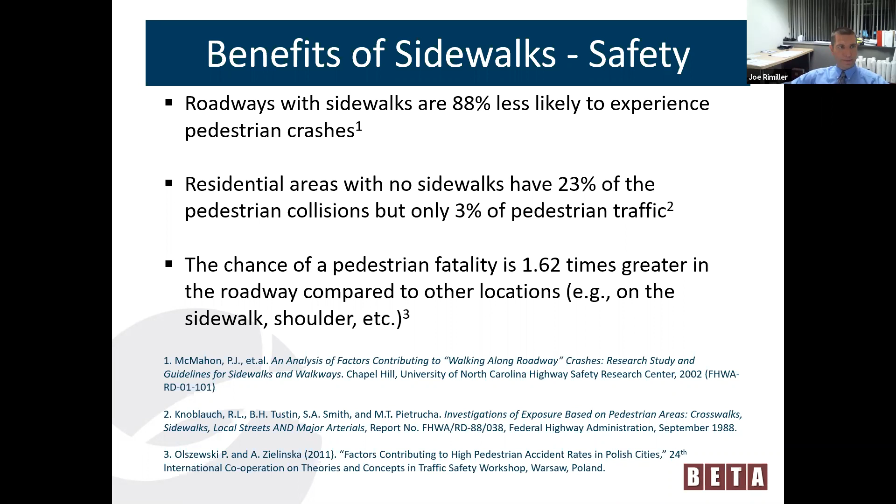In addition to improving safety, sidewalks can benefit a community in several other ways. They can improve public health by encouraging walking, running, and other activities. They reduce reliance on automobiles, which can reduce vehicle emissions and promote better air quality. And they provide accessible paths of travel for users in wheelchairs or with other disabilities.

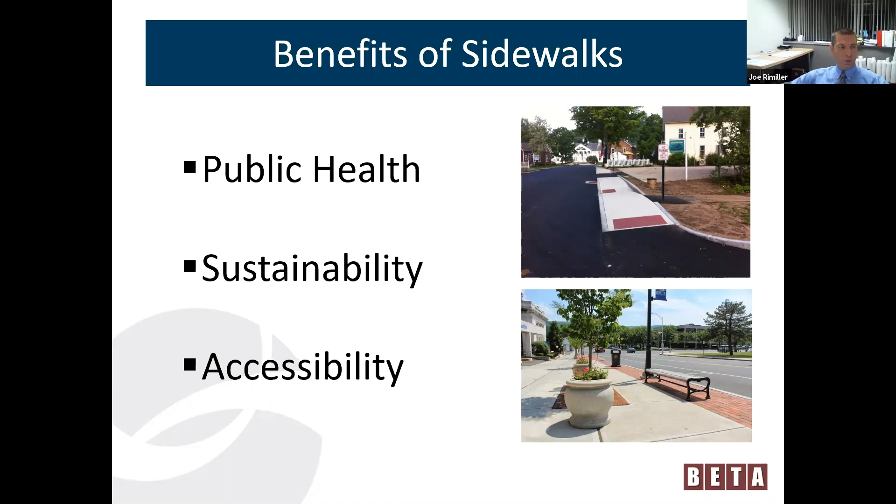This project will involve the installation of sidewalks along several sections of Route 7, Danbury Road. The first section begins on the north side of Candlewood Lake Road South. Sidewalk will be installed on the west side of the roadway, beginning in front of the Candlewood Lake condos, and it'll continue northwards towards the high school.

The sidewalk will be 5 feet wide, concrete, and ADA compliant ramps will be installed at crossings. In addition to the sidewalk installation, we'll be repainting the southbound travel lanes to be 11 feet wide, which allows the shoulder to be widened slightly.

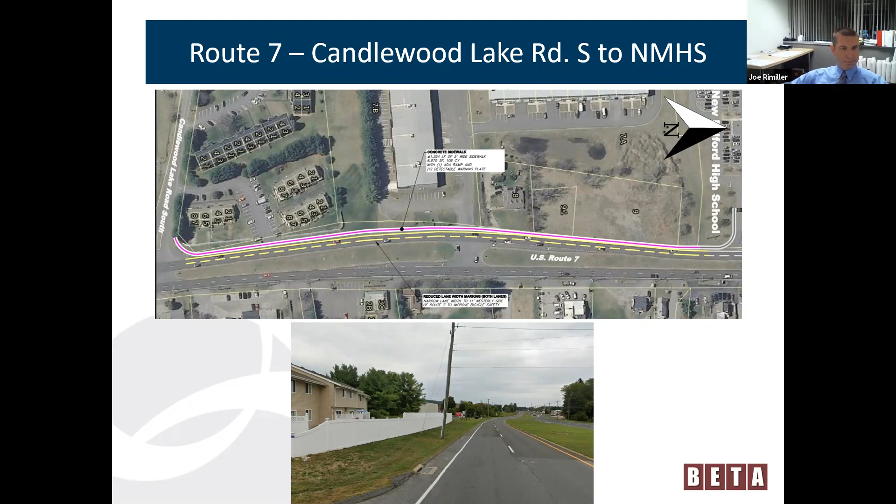That sidewalk will continue north past the high school and Larson Road all the way up to Sullivan Road. Crosswalks will be painted at the entrance to the high school, across Route 7 at Larson Road, and across Sullivan Road. A short retaining wall, only about a 3-foot maximum height, will be needed to the south of Larson Road because there's a steep grade and limited right-of-way.

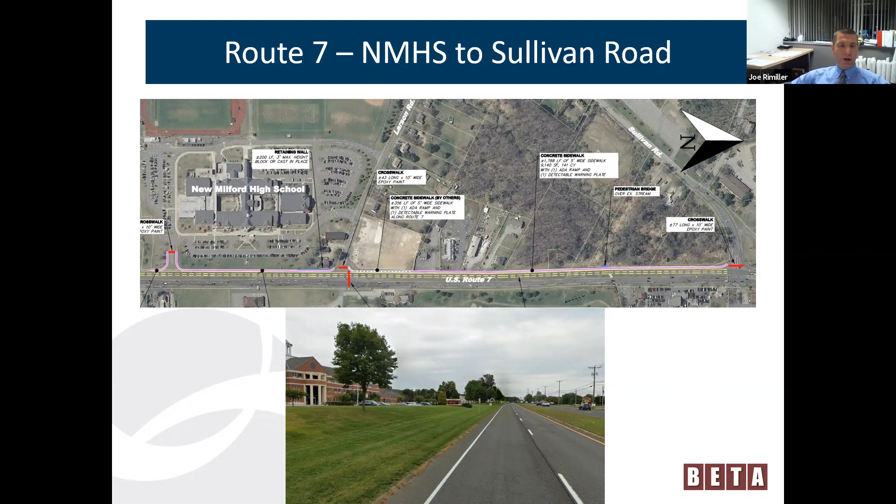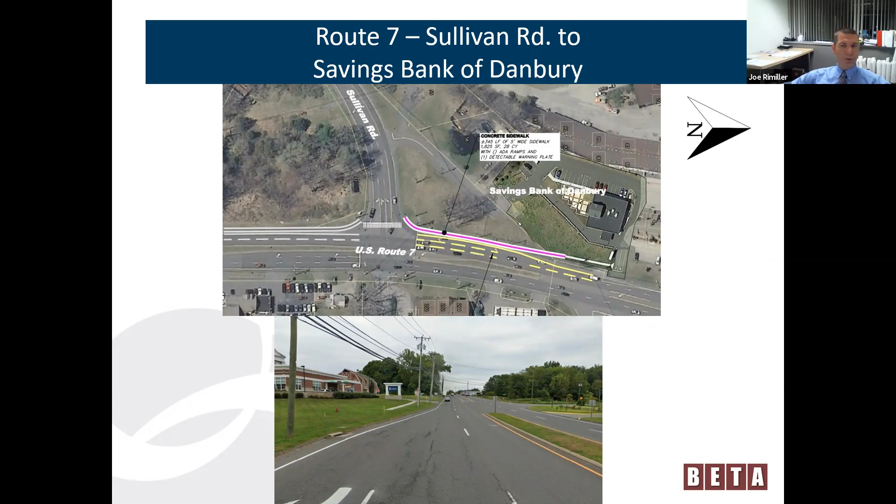A pedestrian bridge will be installed over the existing stream south of Sullivan Road. The new sidewalk will continue to the north side of Sullivan Road, where it'll connect to the existing sidewalk in front of the Savings Bank of Danbury. And we're also anticipating installing new pedestrian push buttons in more accessible locations at the signalized intersection.

Our next location is further north up Route 7 on the east side of Danbury Road, next to the John Pettibone Community Center. The property will be regraded to accommodate the sidewalk installation. And the sidewalk will wrap around Route 7 onto the south side of Pickett District Road, where it will connect to the existing sidewalk that leads to the entrance to the community center. Crosswalks will also be painted at the intersection of Route 7 and Pickett District Road.

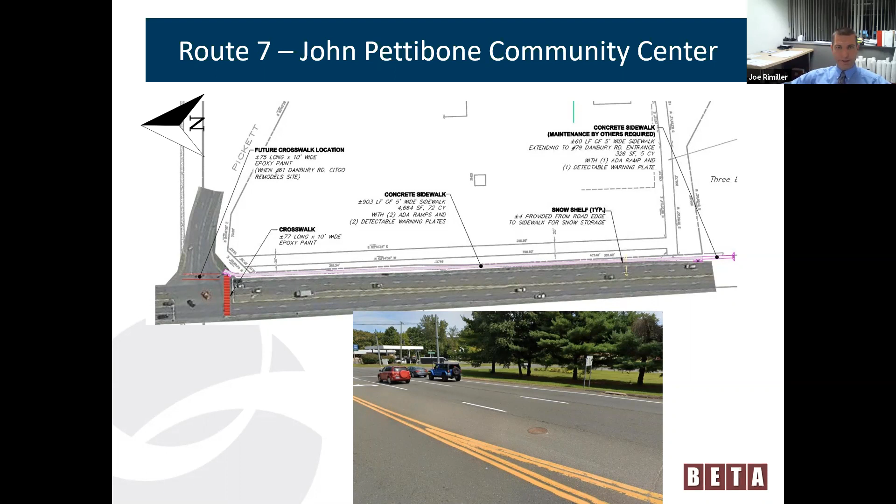Next, we have a shorter section of sidewalk in front of 177 Danbury Road. That's the Taco Bell, where there's a short gap in the existing network. So approximately 100 feet of new sidewalk will be installed, connecting the sidewalks to the north and the south of the property.

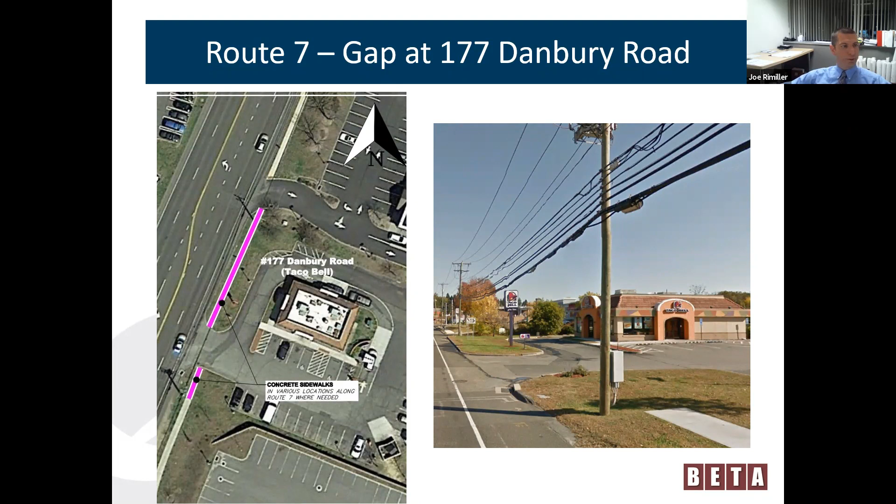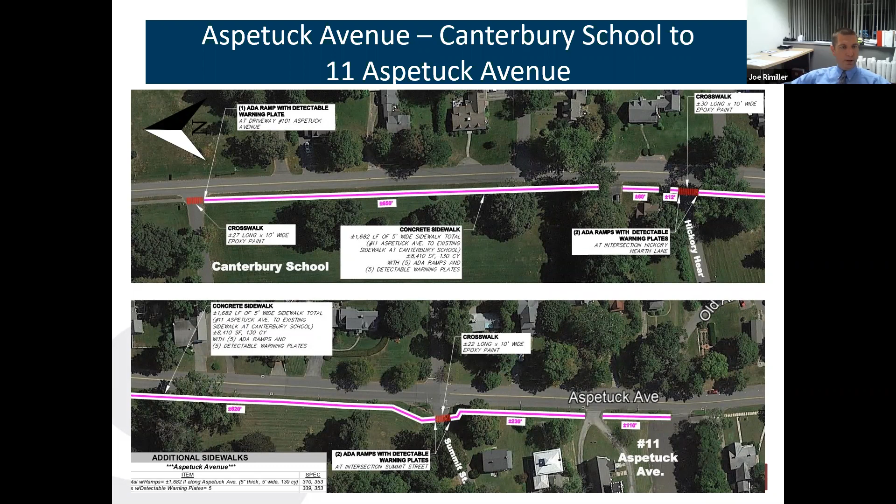So as far as why we selected these sites, land use played an important role. One of the major reasons why these sites were selected was because much of the project area is located on town properties. New sidewalks on private properties on Danbury Road can sometimes be financed by developers, since the town zoning commission requires sidewalk construction as a condition of approval for site plan applications.

The town-owned properties also offer more flexibility in terms of any potential right-of-way acquisitions. Constructing sidewalks at town properties also means that snow removal will be performed by either town or school staff, so there's less of a maintenance burden on property owners.

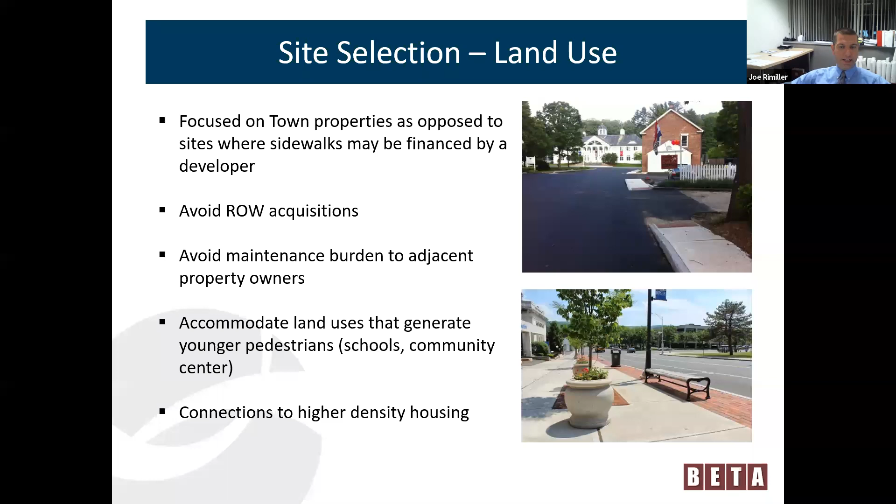Another nice thing about the land use on these sites is that we're providing safer walking areas for younger pedestrians who might be walking to New Milford High School, the Canterbury School, or the community center. And in some instances, the sidewalks will also provide a direct connection to higher density housing, such as the condos south of the high school.

Another reason for installing sidewalks at these particular locations is the high traffic volumes and high speeds on Danbury Road. This data comes from traffic counts performed by the DOT. This gives the average annual daily traffic, or AADT, which represents the daily traffic on a typical day of the year. Within the project area, the AADT on Danbury Road ranges between 25,100 and 30,900 vehicles per day.

We also have the 85th percentile speed shown. That's the speed that is typically used for planning and engineering applications. It represents the speed at or below which 85% of drivers travel during free flow conditions. And at the locations counted within the project area, the 85th percentile speed varies between 41 and 65 miles per hour. That exceeds the posted speed limit, which ranges between 40 and 45 miles per hour.

So with these higher volumes and speeds, it can be uncomfortable for pedestrians to travel on the roadway shoulder or on uneven vegetated land adjacent to the roadway.

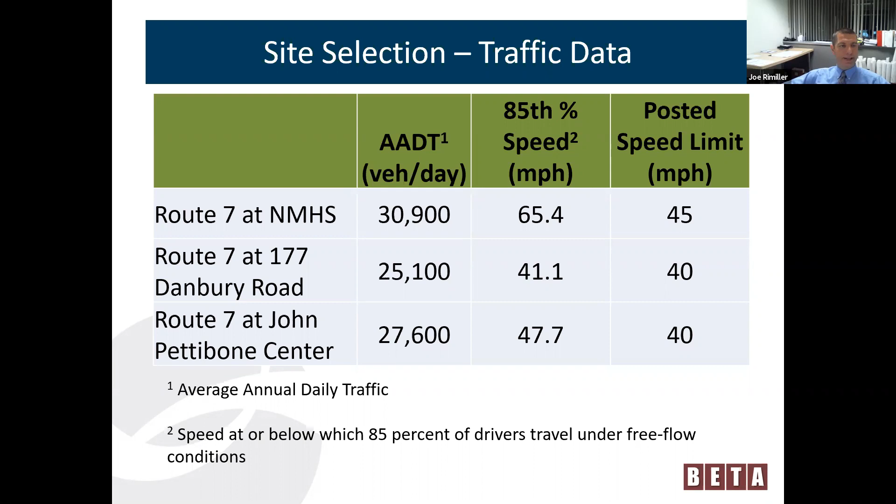Another factor we considered was roadway classification. The Connecticut DOT classifies all roadways according to their intended use and location. Danbury Road is classified as a principal urban arterial, meaning it's located in an urban area and its primary function is to deliver traffic from collector roads to freeways or expressways. AASHTO recommends that sidewalks should be provided on urban arterials wherever frontage is developed.

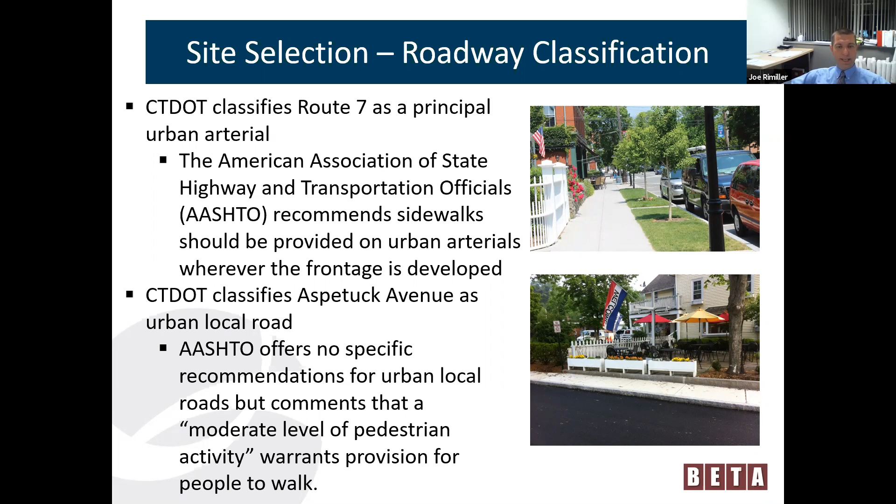Aspetuck Avenue is classified as an urban local road, meaning its main function is to provide access to collector roads and residential areas. And although AASHTO offers no specific recommendations for urban local roads, they do suggest that moderate levels of pedestrian activity on these roads warrant a sidewalk.

We also examined all of the pedestrian crashes that occurred in town within the past 3 years. After eliminating the crashes that occurred in parking lots, there were a total of 17 crashes, and 2 of these occurred within the project area: a fatal crash at the intersection of Route 7 and Pickett District Road, as well as another crash on Route 7 just to the south of the high school.

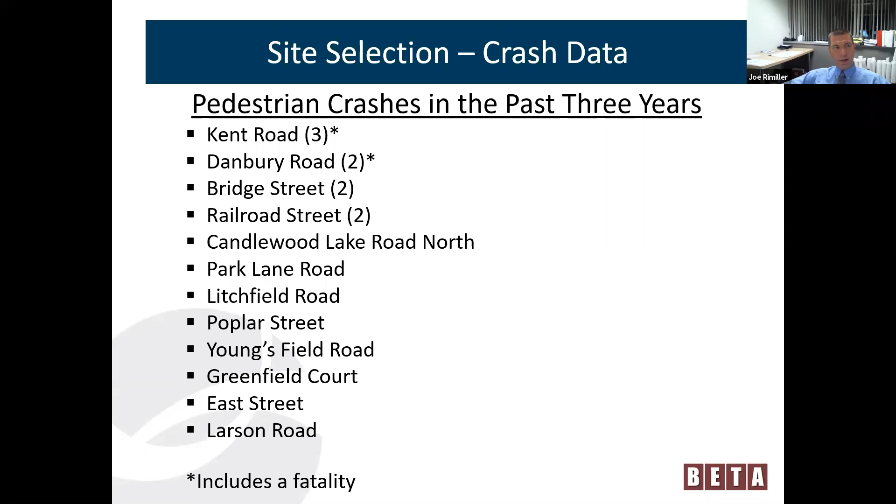Some of the other crashes shown here took place in areas where there are already sidewalks provided, and others involved a pedestrian crossing the roadway rather than walking along it. So a sidewalk may not have necessarily prevented these.

Another factor was connectivity. Where there were gaps in the existing sidewalk network, we wanted to fill the gaps and create a more complete grid. Aspetuck Avenue and the Taco Bell location are good examples of this.

On Aspetuck Avenue, filling the gap allows us to connect the Canterbury School to several miles of connected sidewalk to the south. And at Taco Bell, by adding only about 100 feet of sidewalk, we create a nearly half a mile long continuous segment of sidewalk along the east side of Route 7.

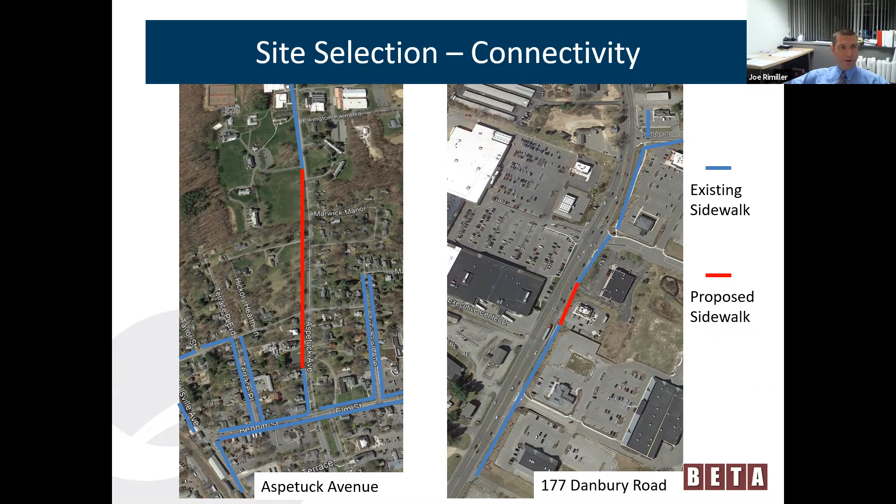Our next reason was better transit access. There's several HART bus stops located within the project area. Access to transit creates connections to jobs, it facilitates independence, and it can improve quality of life.

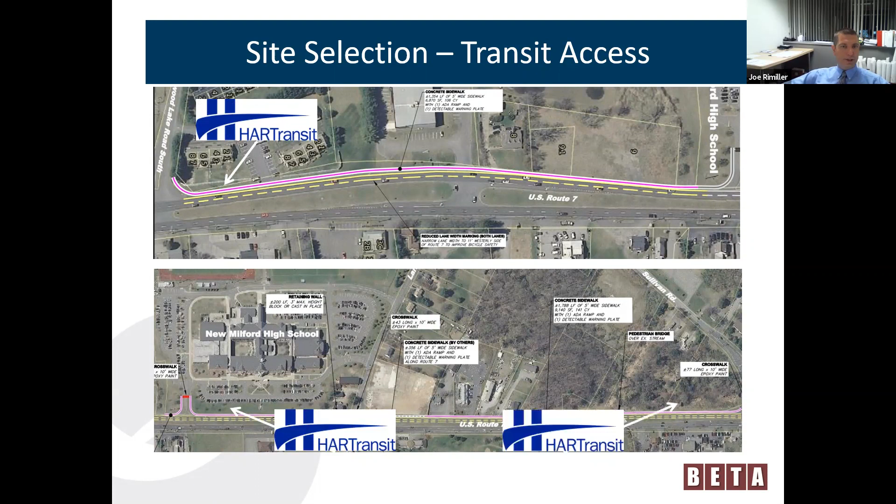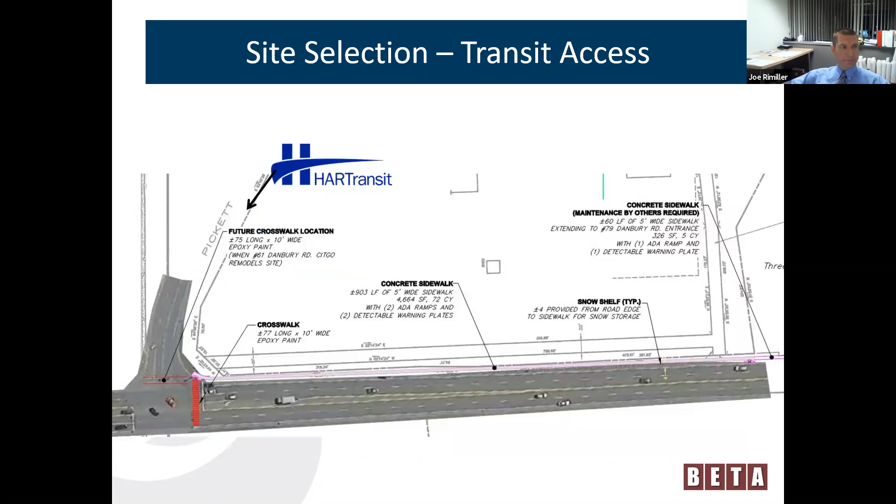The proposed sidewalks will provide better access to HART bus stops at Candlewood Lake Road South, at New Milford High School, and also south of Sullivan Road. There will also be better access to an additional bus stop located right in front of the community center, and another one just south of the Taco Bell location.

The proposed sidewalks will enhance accessibility for those with disabilities. Disabled users will have better access to schools, the community center, retail establishments, employment opportunities, and bus service. Currently, a user in a wheelchair would have to travel along the edge of the roadway in some areas, forced to use a portion of the travel lane since the shoulders are very narrow.

But the new sidewalks will be built in accordance with the Public Right-of-Way Accessibility Guidelines, or PROWAG, the latest standards from the US Access Board. The sidewalks will have a continuous 5-foot clear path. Ramps will have appropriate slopes and detectable warning panels, and bus stops will have appropriately sized boarding areas.

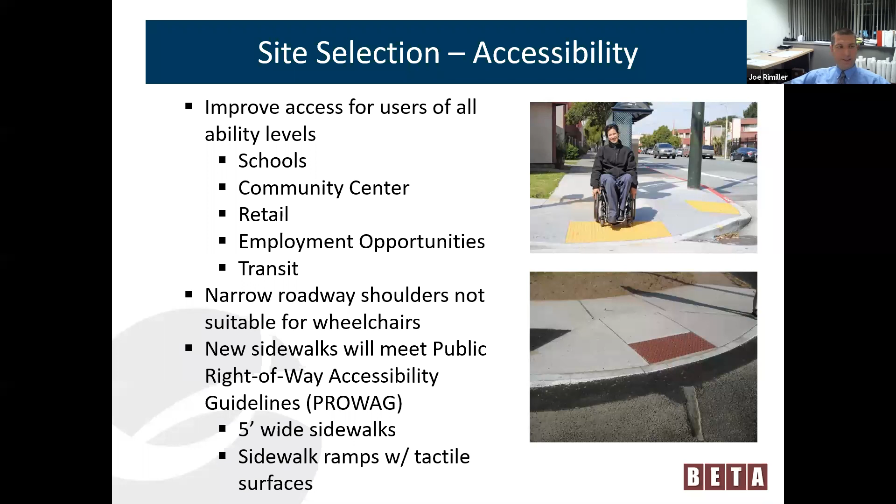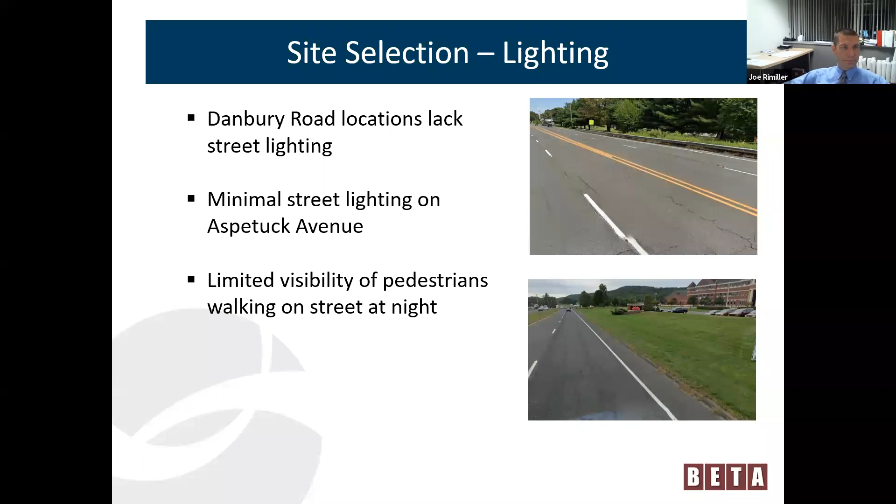The project is funded through the Federal Highway Administration's Transportation Alternatives Program, which funds small-scale transportation projects such as bike and pedestrian facilities, recreational trails, and safe routes to school projects. The program covers costs of design, construction, and right-of-way acquisitions, with an 80-20 federal-local split. Because this is a reimbursable program, the town must first incur project expenses and then request reimbursement.

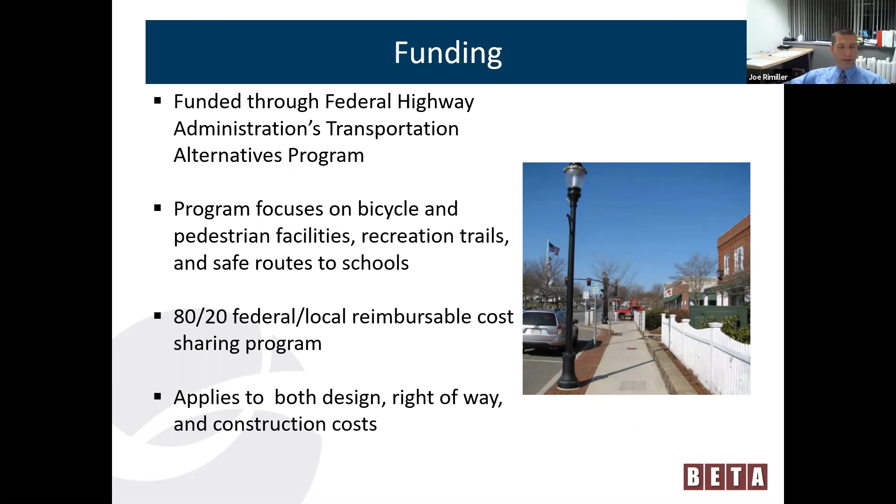Based on the conceptual design, the project cost, including design, construction, and right-of-way activities, is estimated at about $2.3 million. This includes approximately 7,000 total linear feet of new sidewalk, ramps, signal improvements, new pavement markings, and the pedestrian bridge. The town would be reimbursed for 80% of this cost, about $1.8 million, and would be responsible for financing the remaining $458,000.

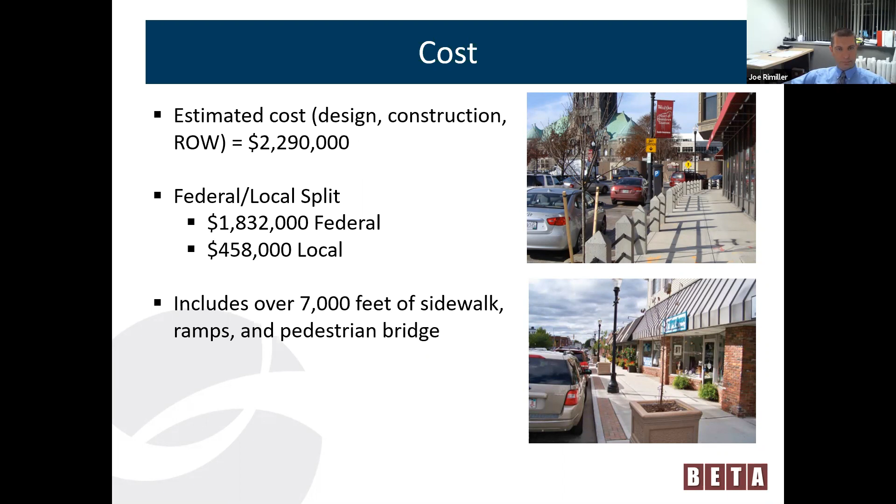We're hoping to begin the wetlands delineation and site survey in the spring at the latest. The design will be performed using a phased approach, with submissions at the 30%, 60%, 90%, and 100% design stages. The next public meeting will take place once preliminary design has been completed, and a detailed design will be presented to the community for review and comment. If an in-person meeting isn't feasible due to COVID restrictions, we'll hold another virtual meeting, and we're anticipating construction getting underway in summer of 2022.